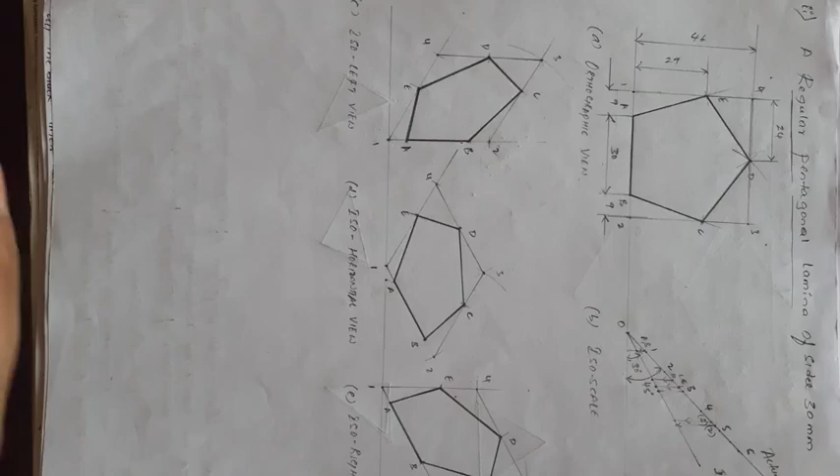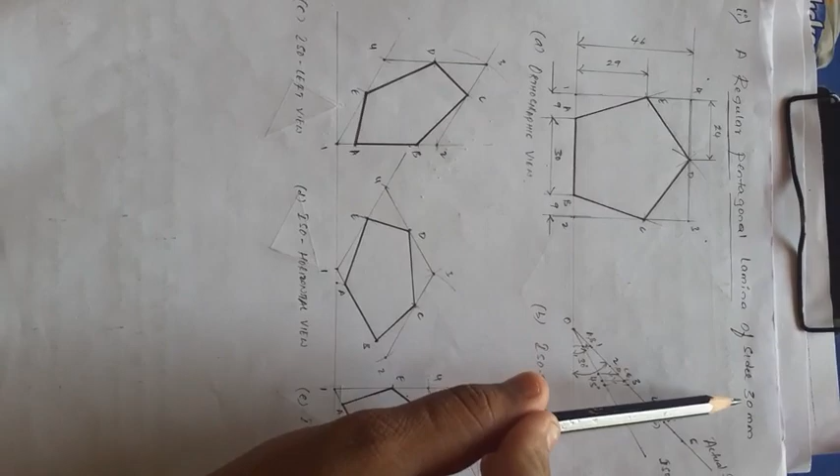What is the procedure? First draw the orthographic projections, and bound that orthographic projection of the lamina by a rectangular box, naming it 1, 2, 3, 4.

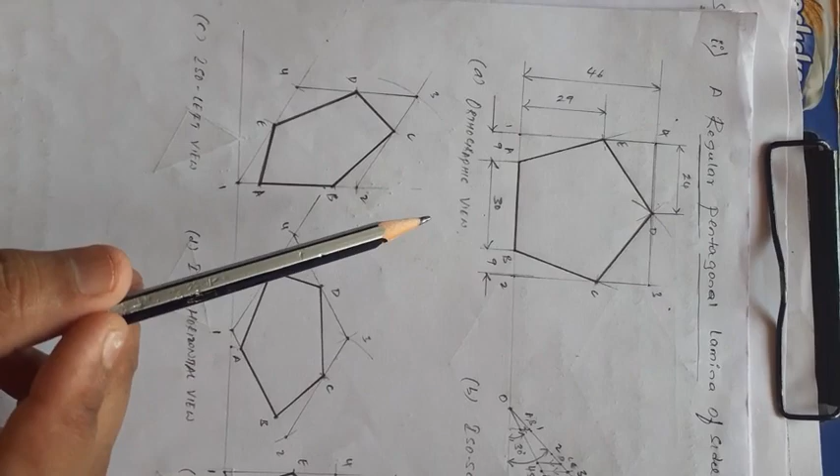Then give the dimensions of the rectangular box and each corner of the lamina. Second step, draw the isometric scale, and third, draw the isometric projection of the lamina.

Right, now first step is the regular pentagonal lamina of 30 mm sides. Do you know how to draw the regular pentagonal lamina?

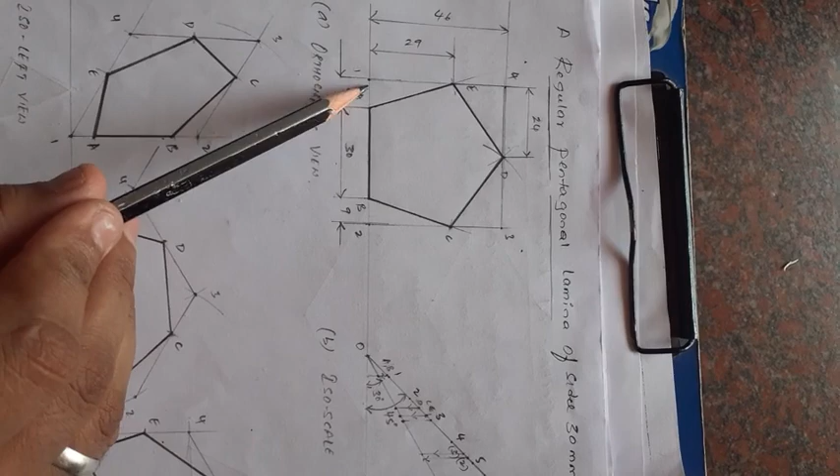Draw a horizontal line of 30 mm. Then with respect to that horizontal line, measure 72 degrees on both sides, and draw the 72 degree line. Using the compass with radius 30 mm, draw an arc on the 72 degree line.

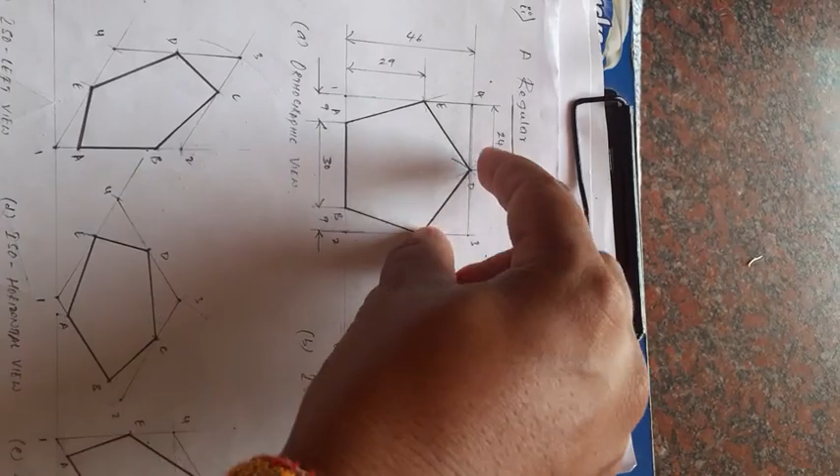From the 72 degree line, once you draw an arc, from the intersection point again take 30 mm radius through the compass and draw an arc from each corner. Then you will get this point.

Then darken all the edges. Now that is the regular pentagonal lamina construction.

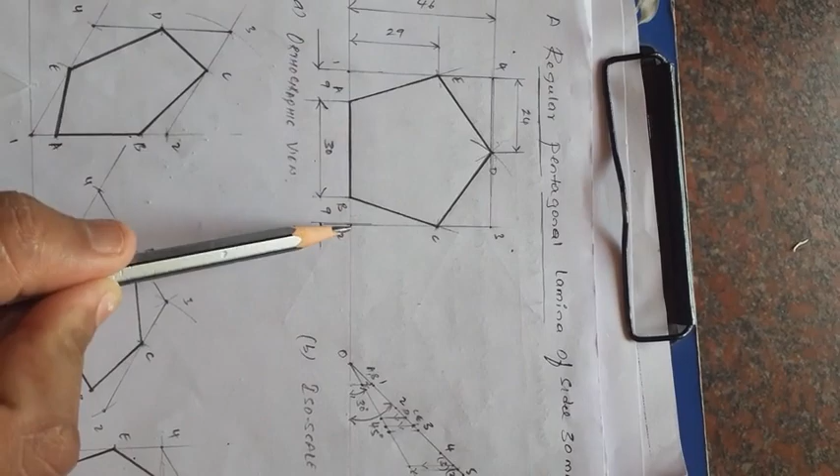After that, the lamina should be bound by a rectangular box. See that 1, 2, 3, 4 is the rectangular box, and then give the dimensions for the rectangular box along with the corners of the lamina. This is the first step.

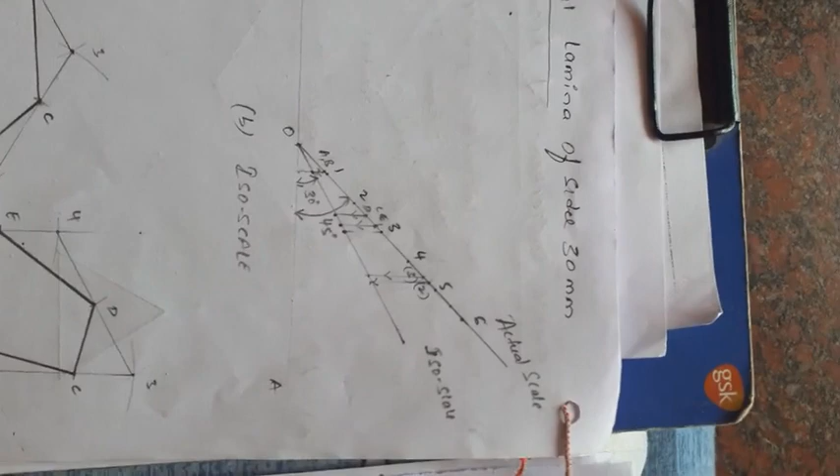Then the second step is to draw the isometric scale. Just draw a horizontal line, that horizontal line is OA.

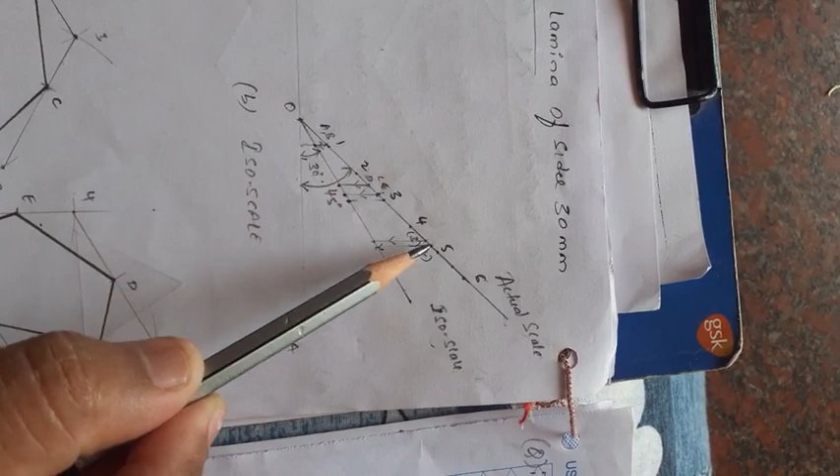Then, with respect to the horizontal line, mark the 30 degree and 45 degree lines. The 45 degree line is called the actual scale, and the 30 degree line is the iso scale. Along the 45 degree line, the actual scale, measure 1, 2, 3, 4, 5 centimeters.

Now I want to draw the first iso left view. What is the iso left view? What is the angle included here? First draw a 90 degree line, then a 150 degree line, or from this side a 30 degree line. Draw the 90 degree line and the 150 degree line.

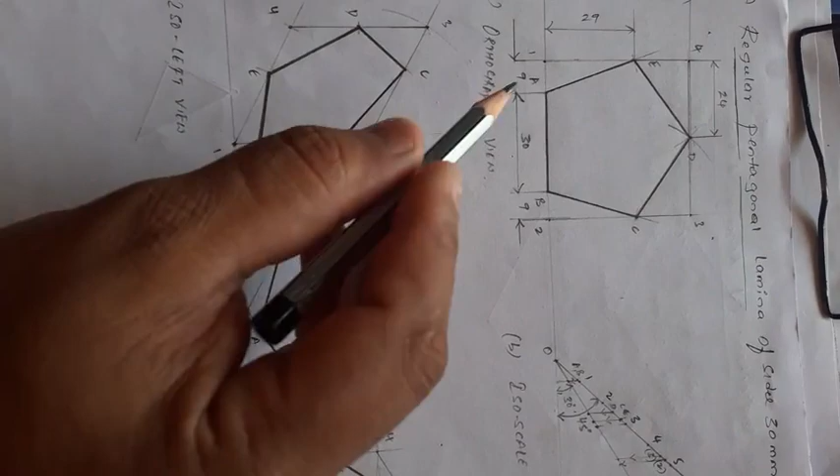Now from this point, called the corner of the rectangle, that is point 1. Once you mark point 1, what is the distance 1 to 2? It is 9 plus 30 plus 9, which is 48.

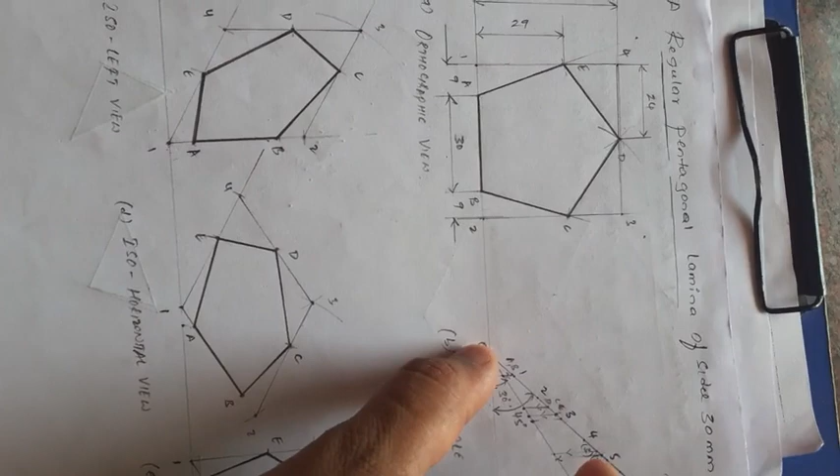48. Now take 48 through the compass on the actual scale and draw an arc. That 48 is represented here in bracket 2. From the 45 degree line, at 48 mm, draw a vertical line that touches the iso scale. Then measure from O to this point.

Then take that through the compass, and from center 1 draw an arc on the 90 degree line. That gives point 2.

Similarly, 1 to 4, what is the rectangular box length? The length of 1 to 4 is measured as 46 mm. Again through the compass, take 1 to 4 as the radius, with O as center, draw an arc on the 45 degree line. That is marked as 3 or 4, as you can call it.

From this, draw a vertical projector, which touches the iso scale or 30 degree line. Then through the compass, measure O to that distance, and from point 1 draw an arc on the 150 degree line. Similarly, with the same radius through the compass, draw one more arc.

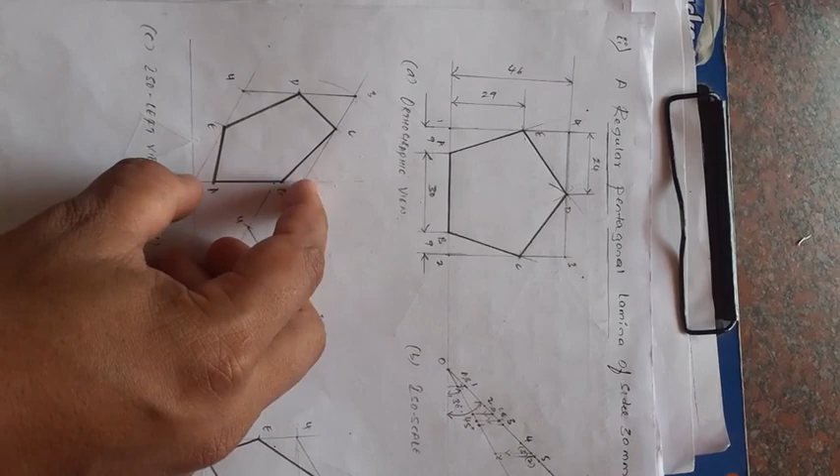Now we already know the 1 to 2 distance, which is equal to 3 to 4. Take that same radius through the compass, which is 1 to 2, and from center 4 draw an arc. The intersection point is called 3.

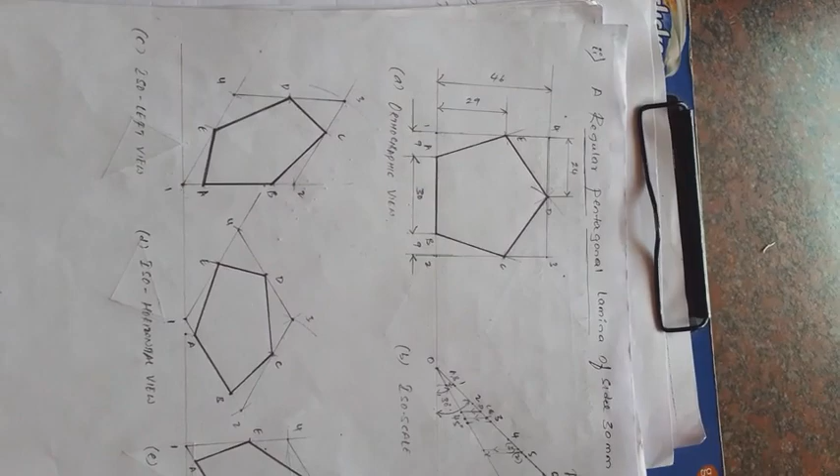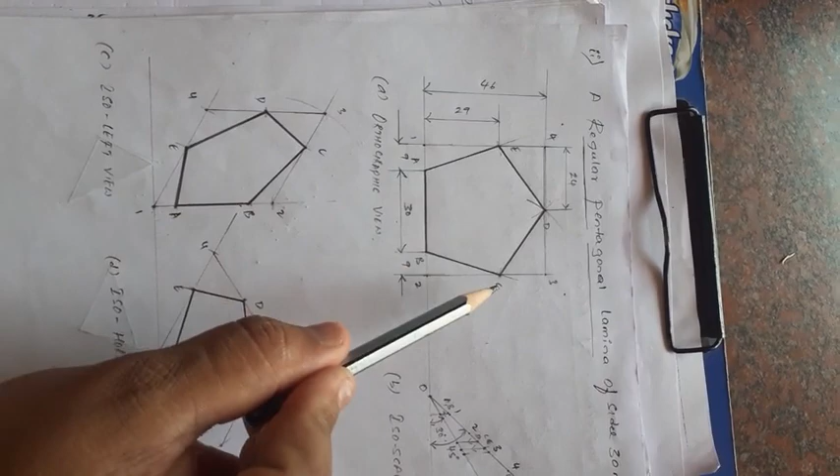First you transfer the rectangular box, which is bounded by the regular polygon, onto the 90 and 150 degree lines. Then you get 1, 2, 3, 4. Then how do you transfer the corners A, B, C, D, E of the lamina onto this 90 and 150 degree line?

Now measure 1 to A, how much is it? 9 mm. Again through the compass, draw an arc of 9 mm on the 45 degree line, called A or B.

From the 45 degree line, draw a vertical projector that intersects the 30 degree line, then take this radius, which is 1a, equal to 2b.

Then where does A lie here? A lies between 1 and 2. So take that distance 1 to A through the compass, and from 1 as center draw an arc. That same distance is also from 2 to b, which is 9 mm.

2 to B is how much? 9 mm. Then again draw the iso scale, convert into iso scale. Then 2 to B also draw an arc. Now we'll get point A and point B, corner A and corner B.

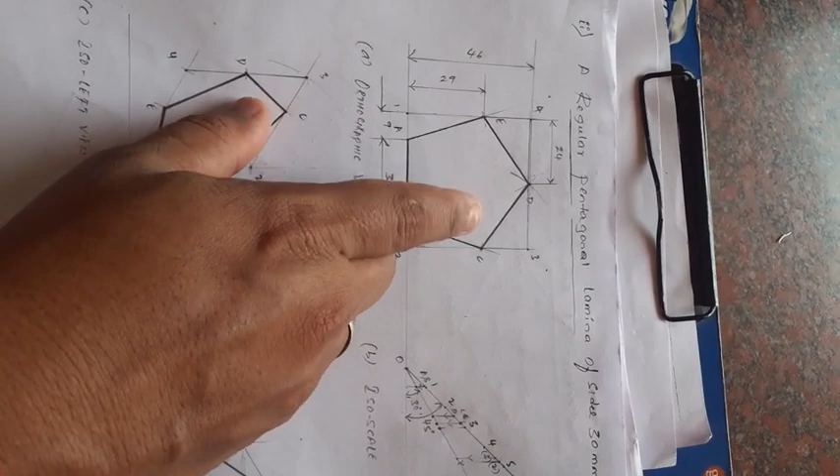Similarly, the E and C distance from this horizontal line is same, right? Measure 1 to E, that is equal to what? 2 to C, how much is it? 29 mm, right? Through compass, O center, draw an actual scale, that is 29 mm, that is C or E.

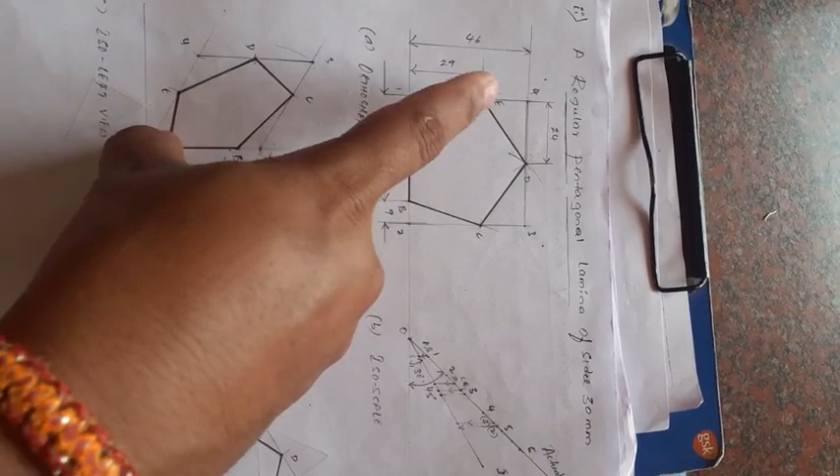Draw a vertical projector on the iso scale. Then O2, this C here on the 30 degree line, measure here. Then take one as center, draw an arc. Where it is, E comes here, E comes between the line of 1 4, right? 1 4 is there, then draw an arc, that gives E.

Similarly, E is equal to C, the distance is same, right? Again C lies between 2 to 3, from 2 as center, draw an arc on the 2 to 3 line. Then we will get point E and point C.

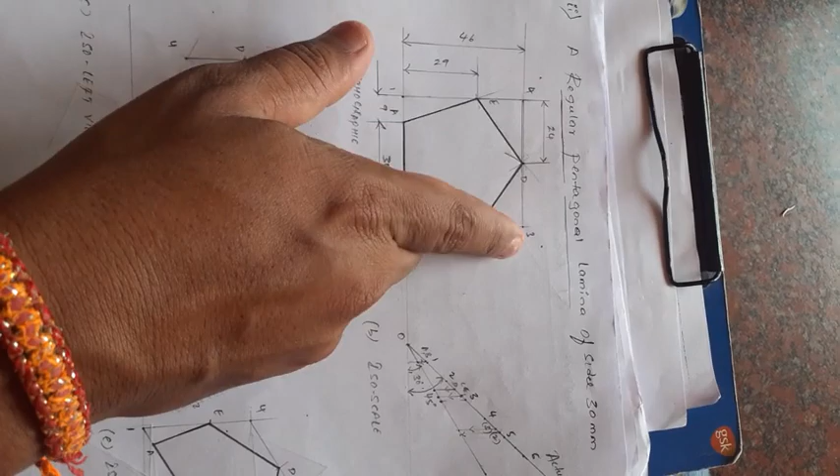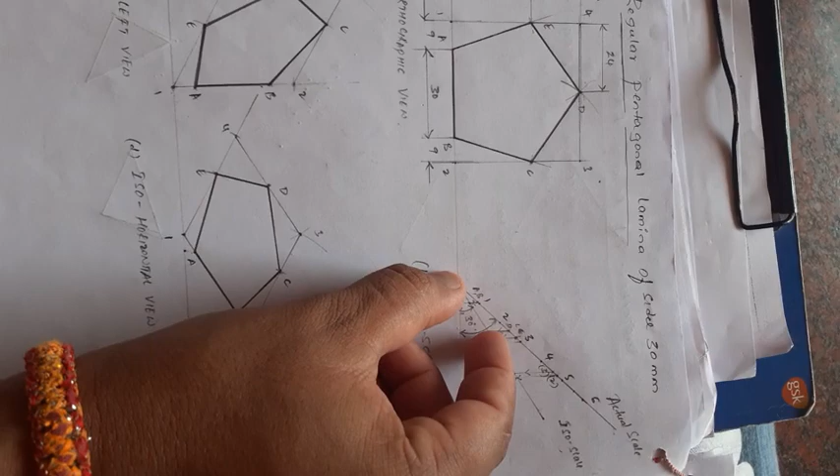Next, how to get point D? Point D lies between 4 and 3 line, right? Take 24 mm through compass, take it in the actual scale, 24 mm, that is point D here, see that. Then draw vertical projector on the iso scale, then through compass measure this point. Then where it is D lies between 4 to 3, then 4 as center, draw an arc, that gives a D point.

Now when we get A, B, C, D, E, then draw it as a continuous thick line, that gives the iso left. Similarly go for iso horizontal.

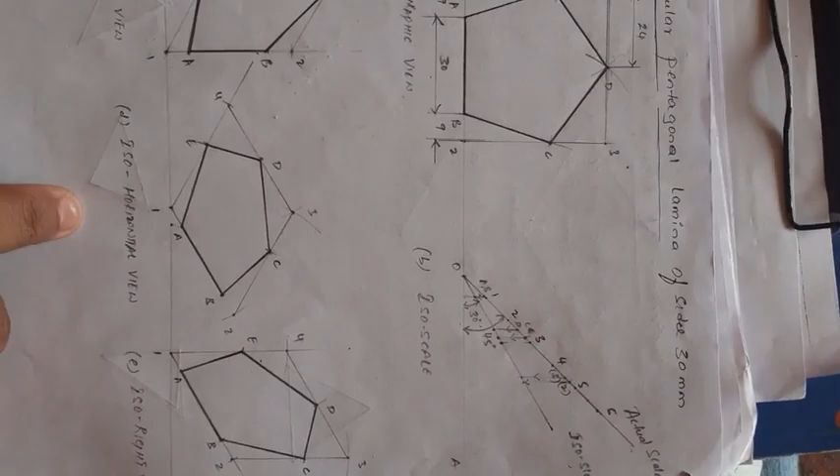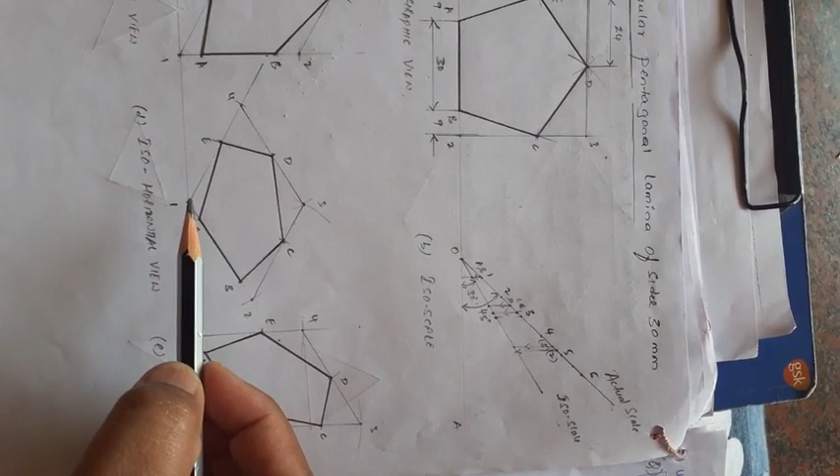For iso horizontal, what is the angle here? The angle is 30 degree, this side also 30 degree, and with respect to this line it is a 150 degree line, right. Mark that, draw from this, draw a 30 degree line and 150 degree line. This point is called as 1.

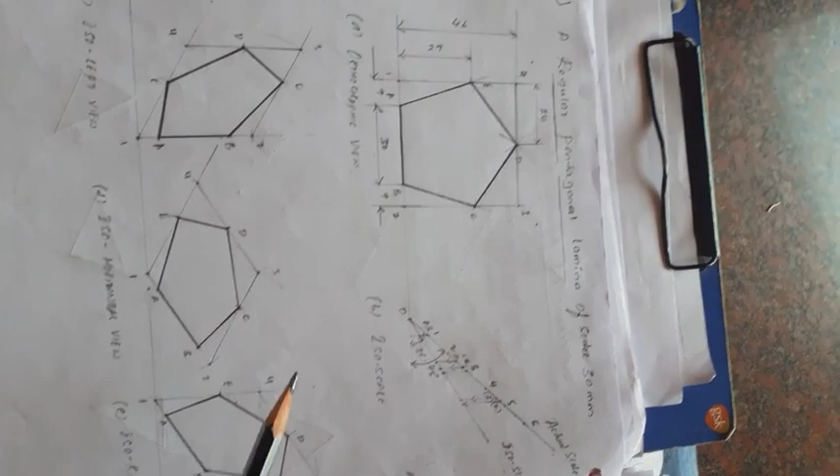Then how do you get corner 2? Directly once you draw this one, similarly directly you just through the compass measure 1 to 2 here and then draw here. Similarly 1 to 4 measure here and draw on the 150 degree line. We will get 2, point 2 on 30 degree line, point 4 on 150 degree line.

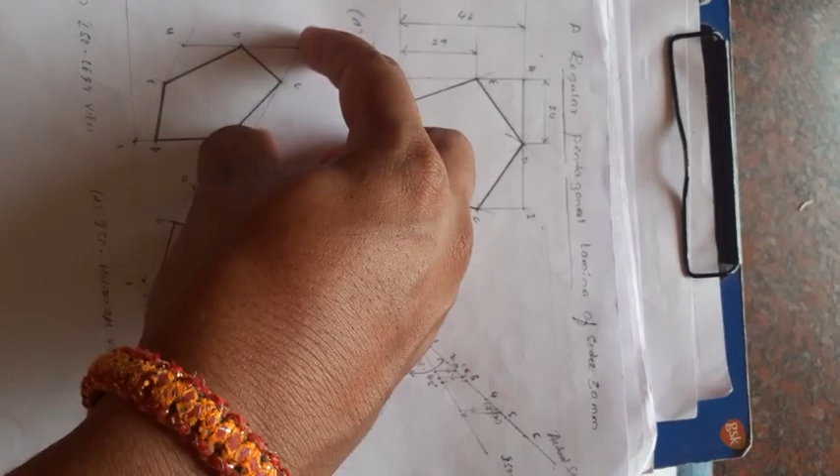How do you get point 3? Then 2 to 3 measure here, 2 to 3 draw an arc. Then 4 to 3 measure here, 4 to 3 draw an arc. Now you get the rectangle box, 1 2 3 4.

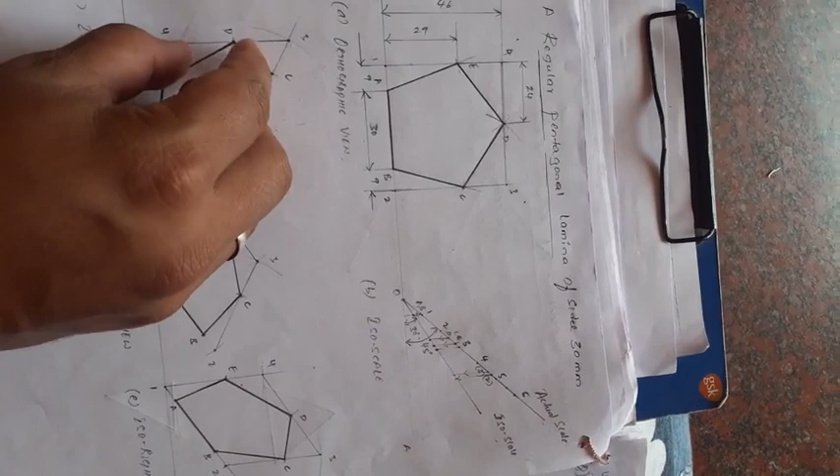Then in the same way, for 1 to A measure through compass, draw an arc on the 1 to 2 line, that is point A will get. Similarly 2 to B. Similarly 1 to E measure, 1 to E and 2 to C. Then measure 4 to D here, then transfer here 4 to D. Now we will get the corner, then join all those corners, we will get the iso horizontal view.

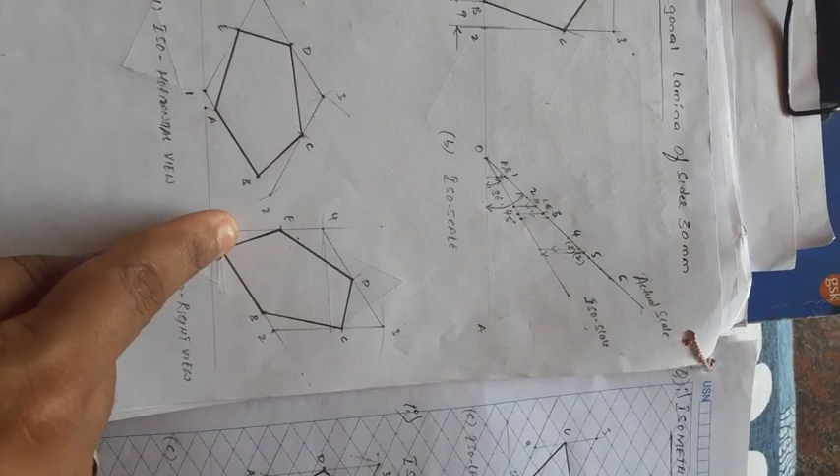Similarly try for this one, for iso right view. Iso right view, what is the angle equal here? 30 degree and 90 degree line, 30 degree line and 90 degree line. Same steps you followed here, right.

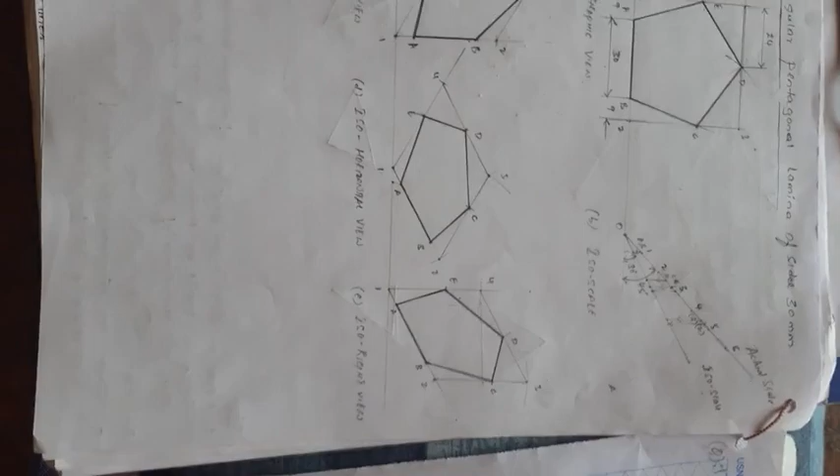Now this is in the plain sheet paper. Then how do you get it in iso sheet, right? This is iso sheet. Now remember, this is what these lines are called as 30 degree line, and these lines are 150 degree line, right. Now the box is represented on the 30 degree line, here given the scale 1 unit is equal to...

8.164 mm, means what is 1 unit? Nothing but 10 mm. So 10 mm of actual length is equal to 8.164 mm of isometric length, or you convert into centimeter, 1 centimeter actual length is equal to what we see in the graph sheet. 1 centimeter actual length is equal to 0.8164 centimeter of isometric length.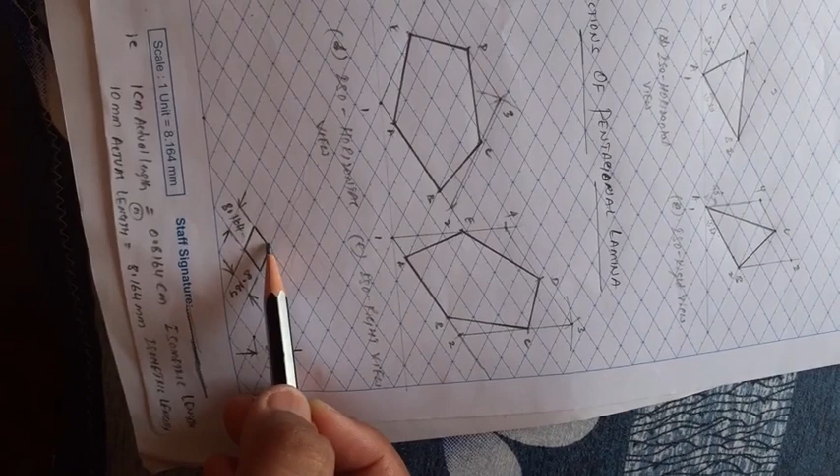Now this distance is what? Isometric length is 8.164 mm, right. This also on 30 degree line, on the 150 degree line also is 8.164. Vertical line also you can take here, from this point to this also it is 8.164 mm, right. Now this is how it looks for iso left, that is 90 degree and 150 degree line.

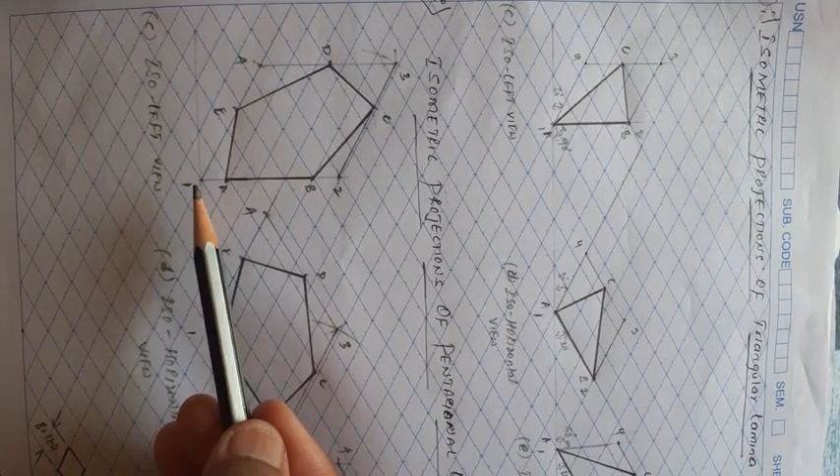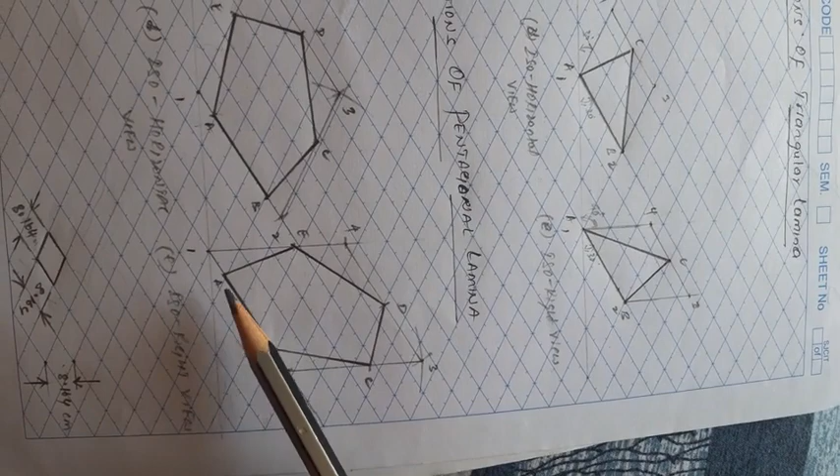It's an iso right, that is 30 degree, and this side also 30 or 150 degree from this side. Iso right: 30 degree line and 90 degree line. Right? Try to solve this problem.

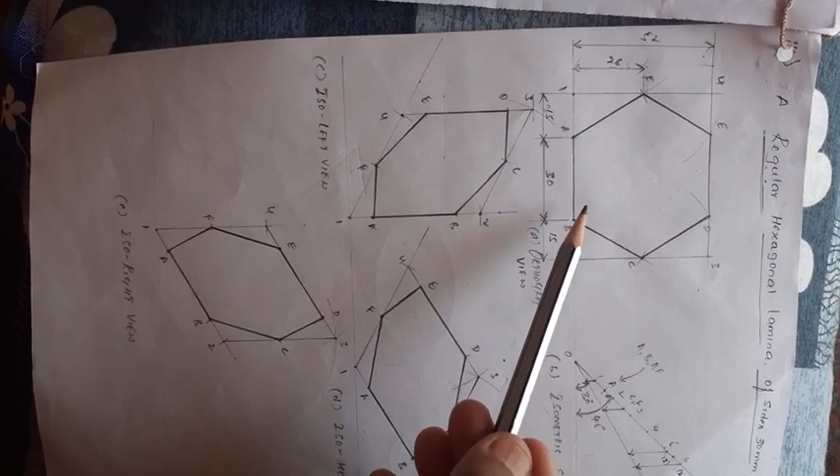Similarly, go for another one, a hexagonal. Go for a regular hexagonal lamina of sides 30 mm. So go for the same procedure. First, draw the orthographic projection of the hexagonal lamina bound by a rectangular box and give the dimension for the rectangular box along with the corner of the hexagon.

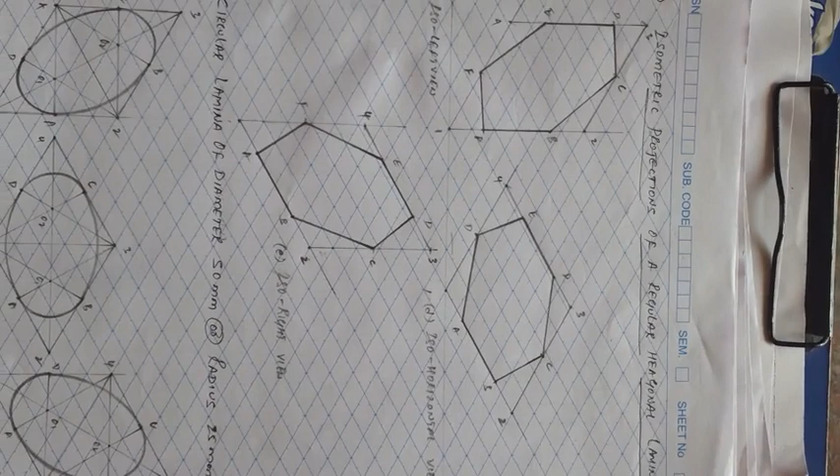Then draw the isometric scale. Then draw the isometric projection, whether iso left, iso horizontal and iso right. Now this is how we look in the isometric sheet.

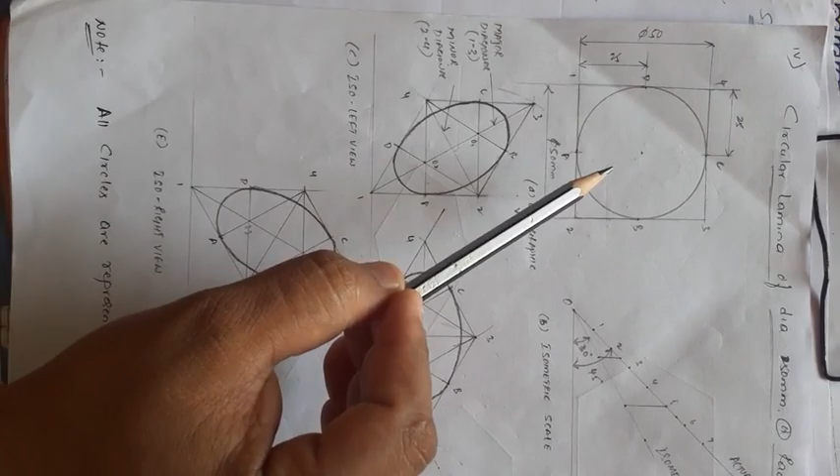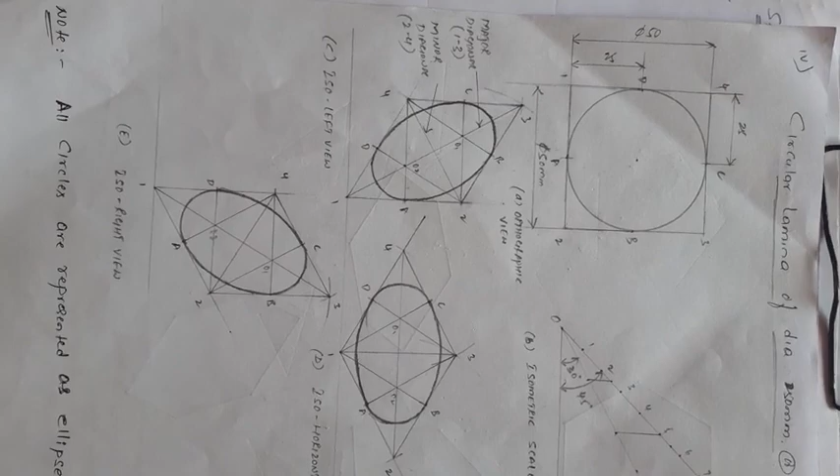Now the next problem is a circular lamina of diameter 50 mm or radius 25 mm. First draw the circle of diameter 50 mm, by taking the compass radius 25 mm. The circle is bound by a box. What type of box? Not a rectangle, it is a square box. Each side of the square box is 50 mm, and the center is 25 mm. So here we get directly 25 and 50 mm.

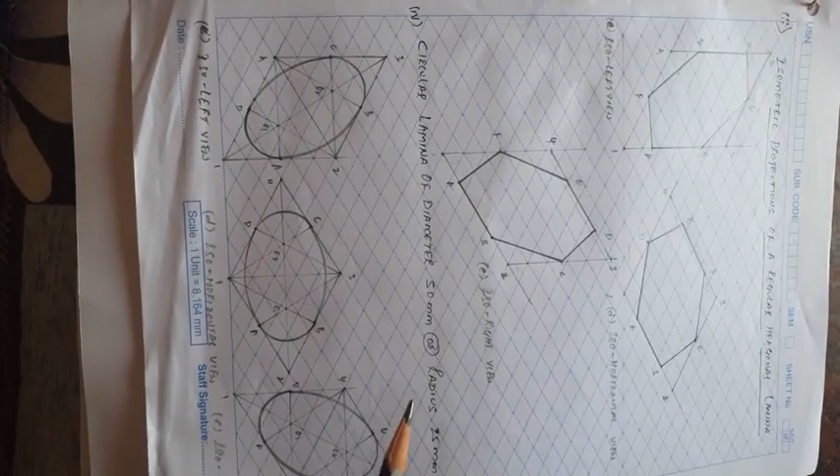Either you want to draw an isometric scale or not, directly use the isometric sheet. So this is the first position, orthographic. Draw the orthographic view of the circular lamina bound by a rectangular or square box and give the dimensions. Then, if you want, draw the isometric scale on a plain sheet of paper, or if using an iso sheet directly do it. No need for isometric scale because the dimensions are round values, 25 and 50 mm.

Now first we will draw the iso left view. What is the iso left view angle? One is 90 degree, another one is 150 degree, or from this it is 30 degree. First draw the 90 degree line, then the 150 degree line. The corner, name it as 1.

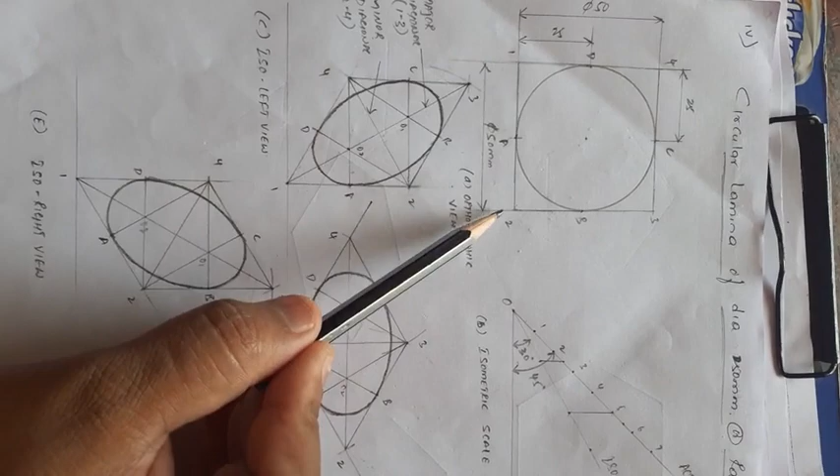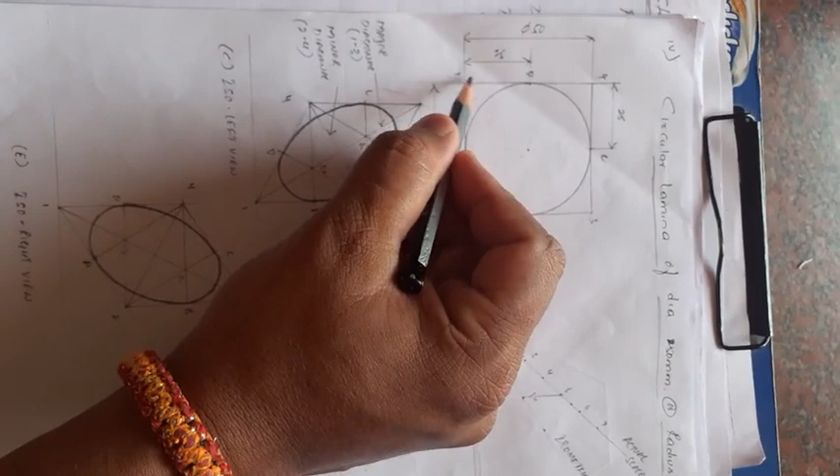From 1 to 2, how much is it? 50 mm. From 0, already in the actual scale, 5 cm is there, 50 mm is there. Draw a vertical projector on the isometric scale, measure this over to this dimension, and through the compass draw an arc on the 90 degree line. Similarly draw 1 to 4, also 50 mm, through the compass on the 150 degree line, you will get points 2 and 4. From 2, again through the compass using the iso scale, radius 2 to 3, draw an arc, and 4 to 3 also draw an arc.

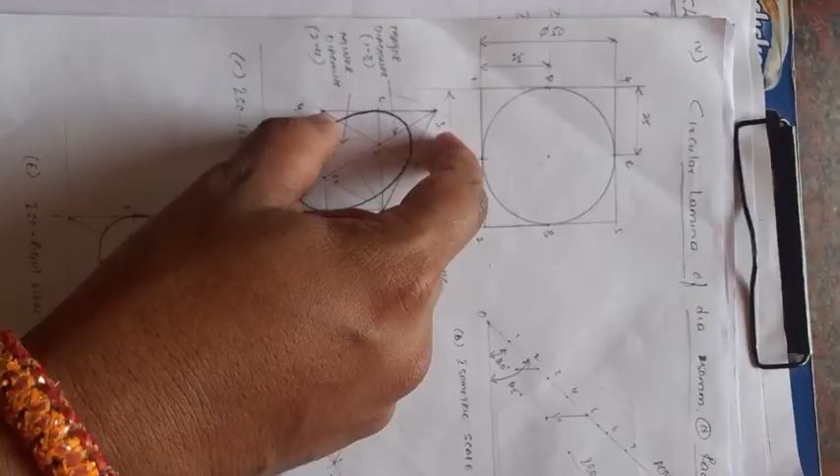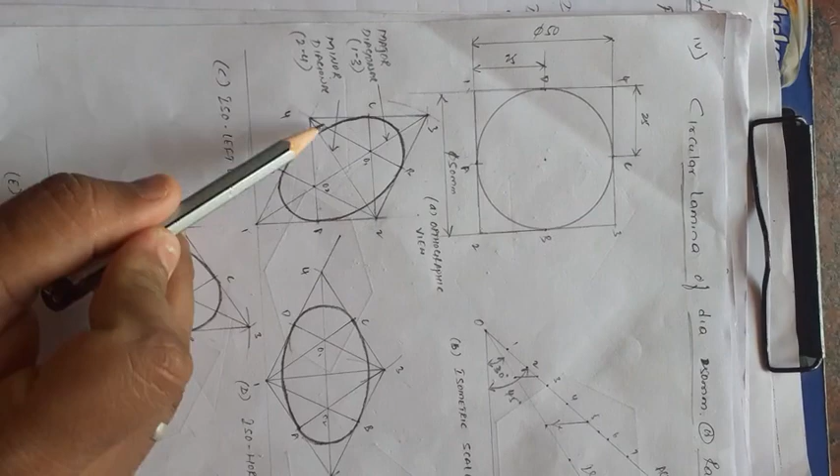That gives 1, 2, 3, 4, the square box that looks as a rhombus in iso left view. Then join the corners of the square, 1 to 3 — this is called the major diagonal. Join this line of corners, and also join 2 to 4 — this is the minor diagonal, that is 2 to 4.

Then you will get 1 to A, the distance, equal to 1 to D, 25 mm. Now on the actual scale measure 25 mm, draw a vertical projector on the iso scale, then measure this over to this point, then from 1 draw an arc on 1 to 2. Similarly on 1 to 4 also draw an arc. That point will give A and D. Similarly from 3, the same distance, draw an arc, and now we will get point B and point C.

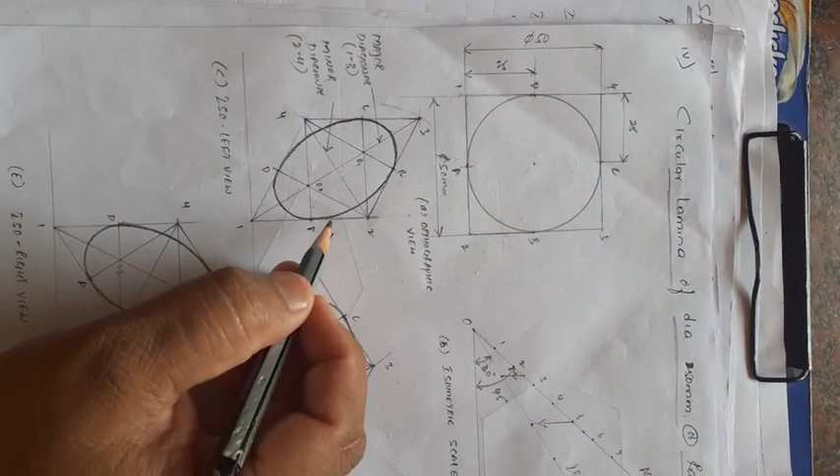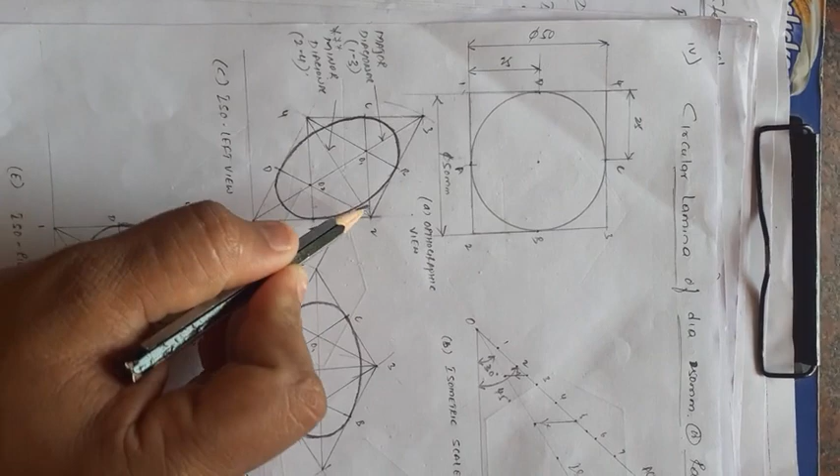Now mark the points A, B, C, D. Now get the center of that rectangular box, which as a square box you will get. Then take the minor diagonals. Remember, this is very important: use only the minor diagonals, which are 2 and 4, the line joining 2 and 4. From the minor diagonal corner 2, draw a line to the opposite side middle points, that is C and D — draw a line, 2 to C and 2 to D.

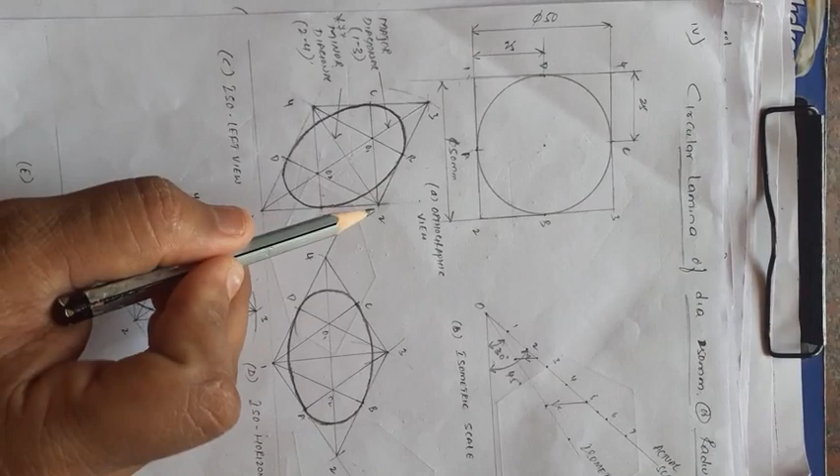Similarly, the other minor diagonal corner is 4; from corner 4 draw a line to the opposite side middle points A and B. Now the intersection of 2 to C, 4 to B, and the major diagonal 1 to 3 is called O1. Similarly, the intersection of 4 to A, 2 to D, and the major diagonal 1 to 3 is called O2.

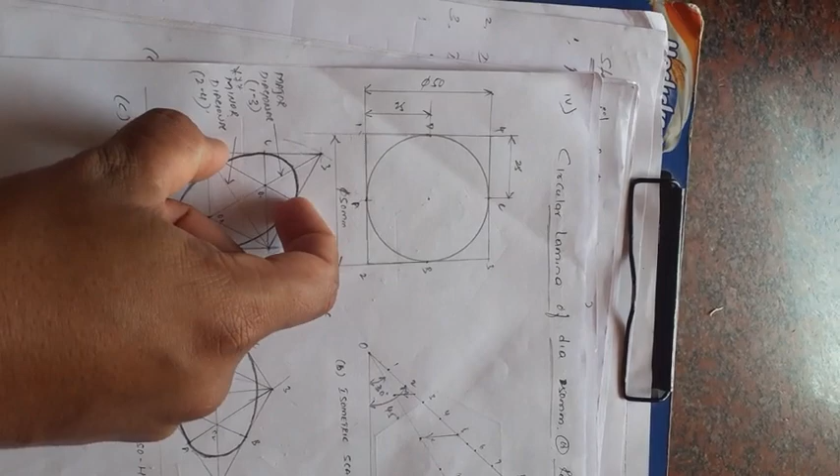Then through the compass, take 4 as the center, with 4A equal to 4B as the radius, and draw an arc. 4 is the center, 4 to A is the radius, equal to 4 to B, then draw an arc. Similarly, 2 is the center, with the same radius, 2 to D equal to 2 to C, and draw one more arc here.

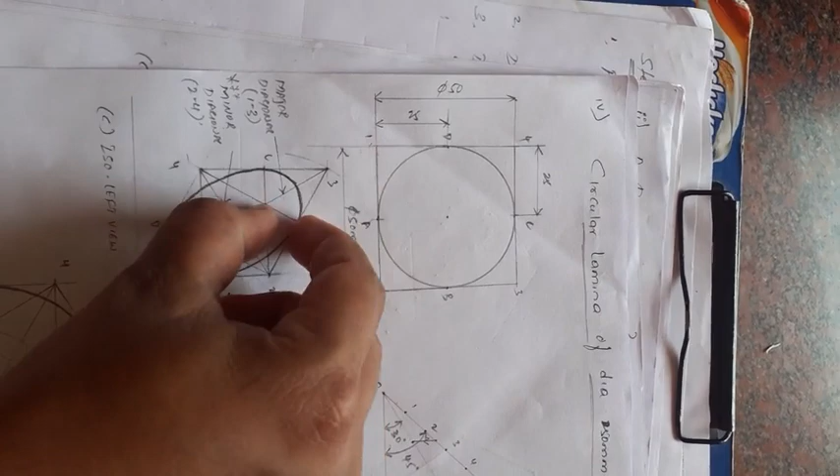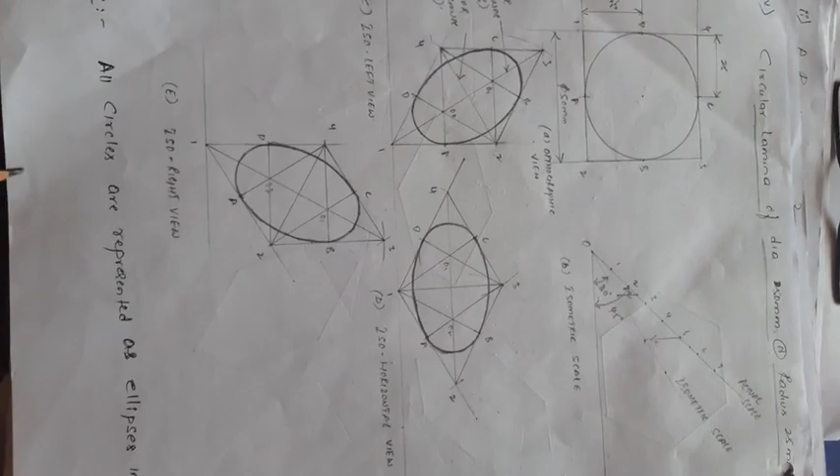After that, take O1 as the center, O1B as the radius, equal to O1C, then draw an arc. Then O2 is the center, O2D is the radius, equal to O2A, then draw an arc. Now the circle looks as what shape? An ellipse. All circles are represented as ellipses in isometric. Now this is how to construct the iso left view, and make the ellipse a continuous thick line.

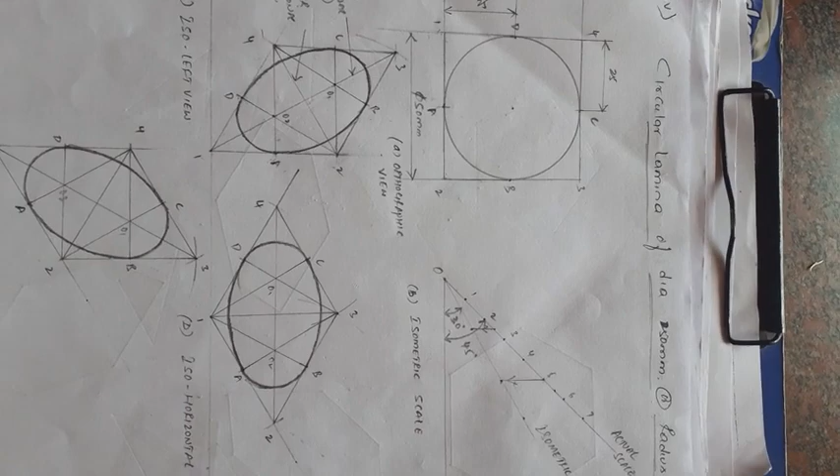See that in isoscale, in the isometric sheet also, what is 1 to 2, how much is it? 50 mm, meaning 10 mm is equal to 1 unit, equal to 8.164 mm. So 1 block equals 8.164. Already here it is 50 mm. 1 to 2, how much? 50 mm means 5 blocks: 1, 2, 3, 4, 5.

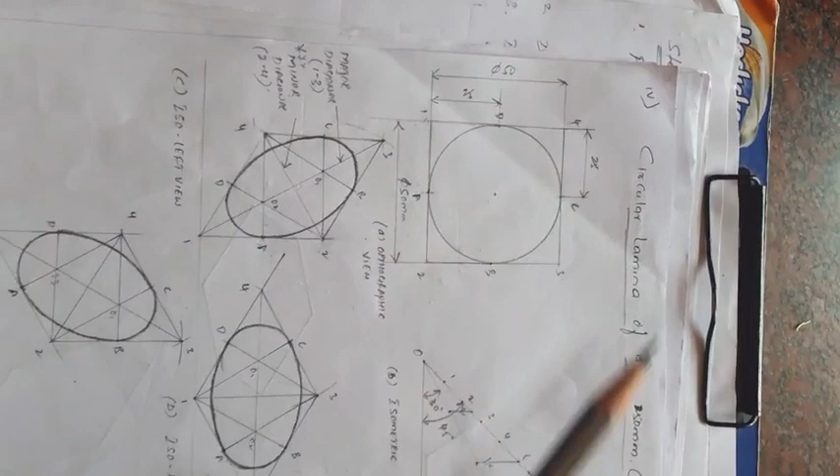Draw a vertical 90 degree line. Along the 90 degree line, how many blocks do you measure? 5. Then you get point 2. Similarly, on the 150 degree line, how many blocks do you measure? What is 1 to 4? 1 to 4 is 50 mm, meaning 10 mm equals 1 block. Now that is converted to isoscale.

Now how many blocks do you measure along the 150 degree line? 5 blocks: 1, 2, 3, 4, 5. You get the square box. Now from corner 4, draw a vertical line, and from this, draw a 150 degree line. The intersection point is called 3. Now you get 1, 2, 3, 4. Now 1 to 3 is the major diagonal, 2 to 4 is the minor diagonal.

Now what steps do we follow here? The same steps are followed here to construct that ellipse for the iso left. Similarly, go for the iso horizontal.

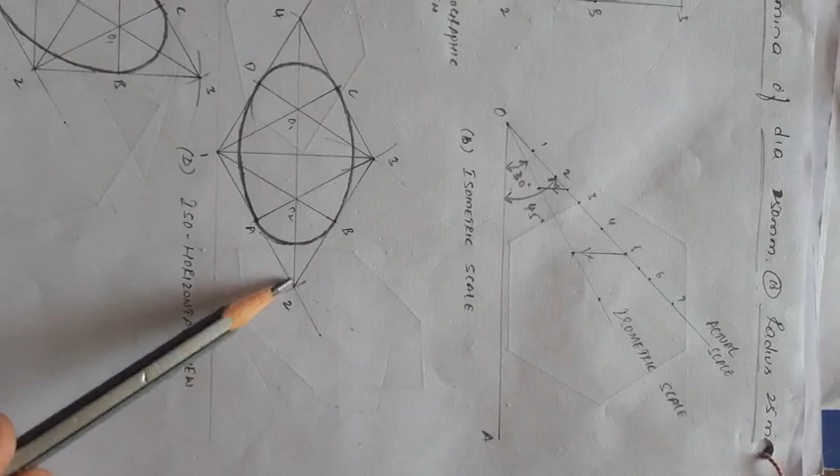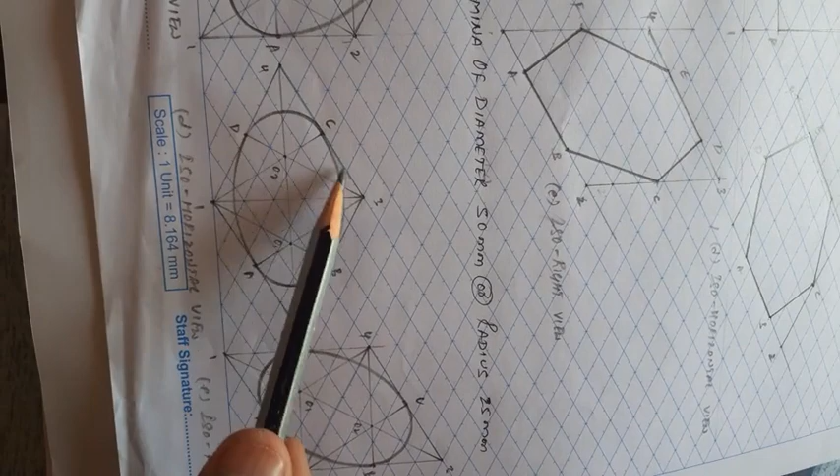Draw a 30 degree line and a 150 degree line. See the 30 degree line and 150 degree line. Along the 30 degree line, measure 5 blocks. Along the 150 degree line also measure 5 blocks. This is 50 mm. Then from 2, draw a 150 degree line, and from 4 a 30 degree line; the intersection point is 3. Here 2 to 4 is the major diagonal, 1 to 3 is the minor diagonal.

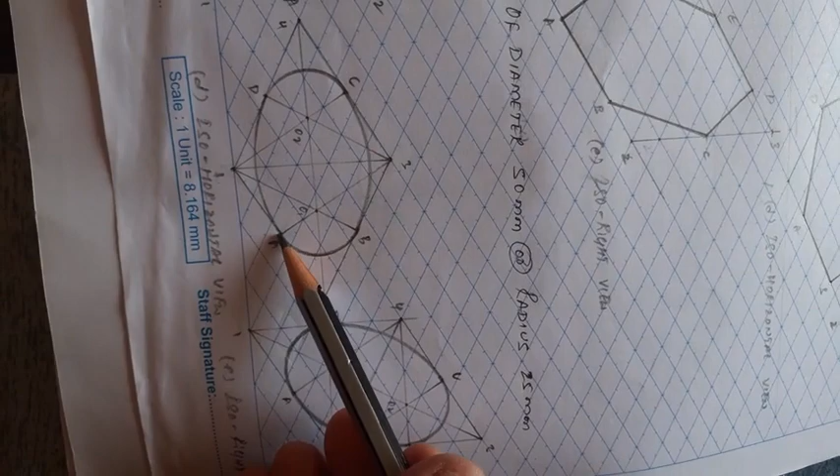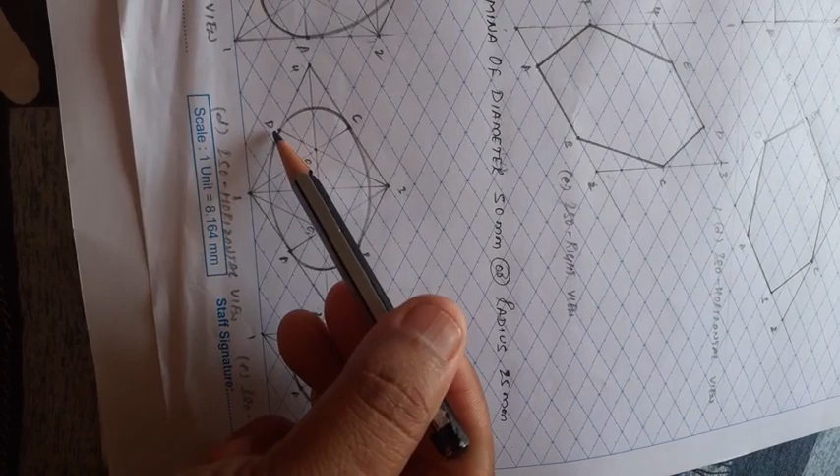How do you get the center point here? Look, the center of the square is 25 mm. 1 to here, 1 to D is 25 mm. How do you get 25 mm? Nothing but 2.5 blocks: 1, 2, you get exactly the center, 2.5 blocks. Similarly, on 1 to 4, what is the block here? 25 mm, how many blocks? 2.5 blocks: 1, 2, here 2.5. Similarly, go for 3 to 4 and 4 to 3 also. You will get A, B, C, D.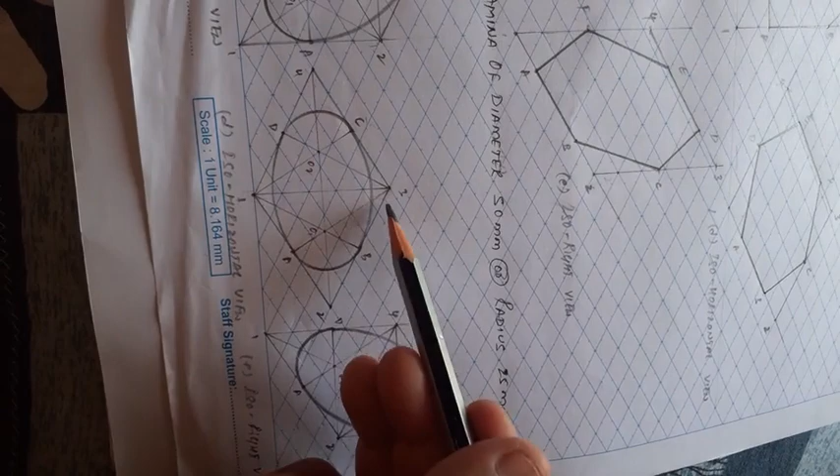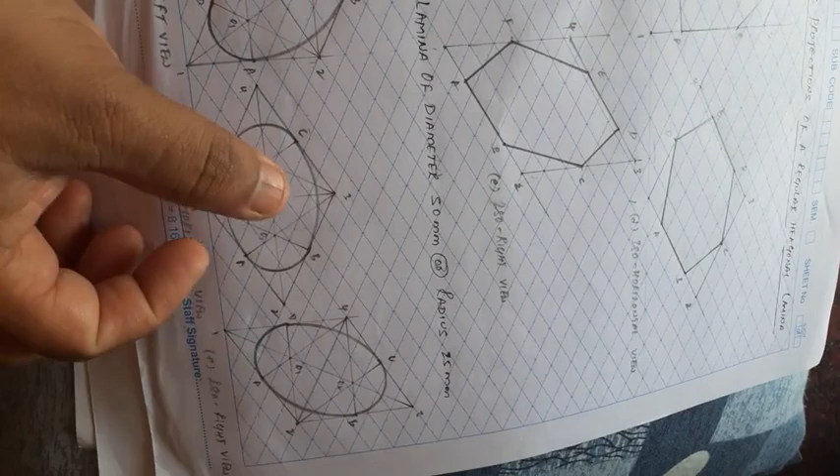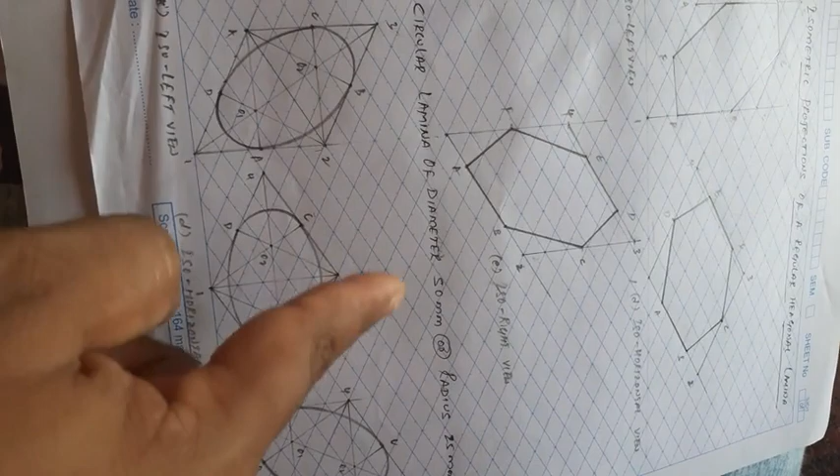Now from the minor diagonal corner, on the opposite side, the middle point, draw a line 1 to B and 1 to C. Similarly, 3 to D and 3 to A. The intersection points give O1 and O2. Take 1 as the center, 1B equal to 1C as the radius, then draw an arc, you get the ellipse. Then 3D equal to 3A is the radius; through the compass, draw an arc, that gives another arc. Then O1 is the center, O1B is the radius, equal to O1A, then draw an arc. Similarly, O2C equal to O2D, then draw an arc, and you get an ellipse—that is the iso horizontal view.

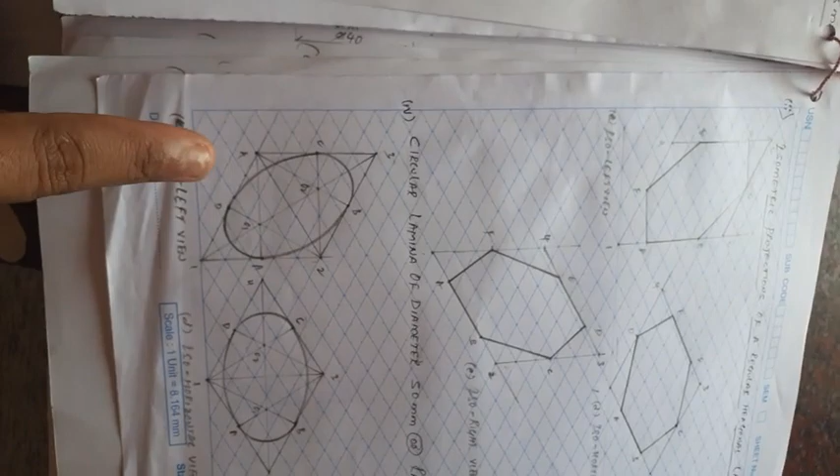Similarly, go for the iso right view. Now in all three positions—iso left, iso horizontal, iso right—we see the circle looks as what? It looks as an ellipse. Now this is a circle.

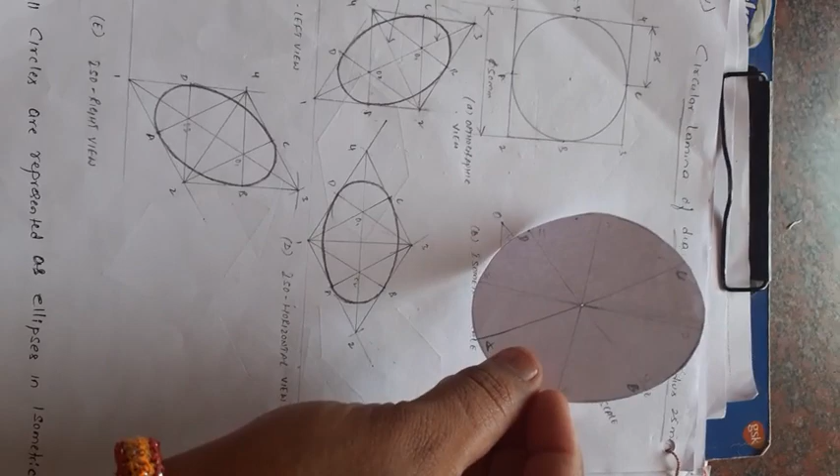Assume this is a 50 mm diameter circle. Now we'll make it iso left. What does it look like here? It looks as an ellipse, for the iso left. Similarly, go for iso horizontal—that also looks as an ellipse. We'll go for iso right—for iso right also the circle looks as an ellipse.

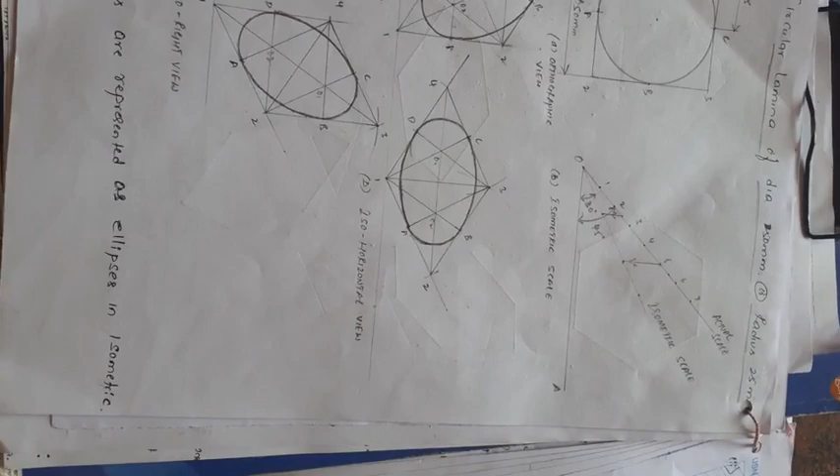This is a concept. Try to solve these problems: the isometric projection of regular polygons—triangular lamina, pentagonal lamina, hexagonal, and circular lamina—and send it to my WhatsApp number. Okay, then we'll check it. Any corrections, we'll do it.

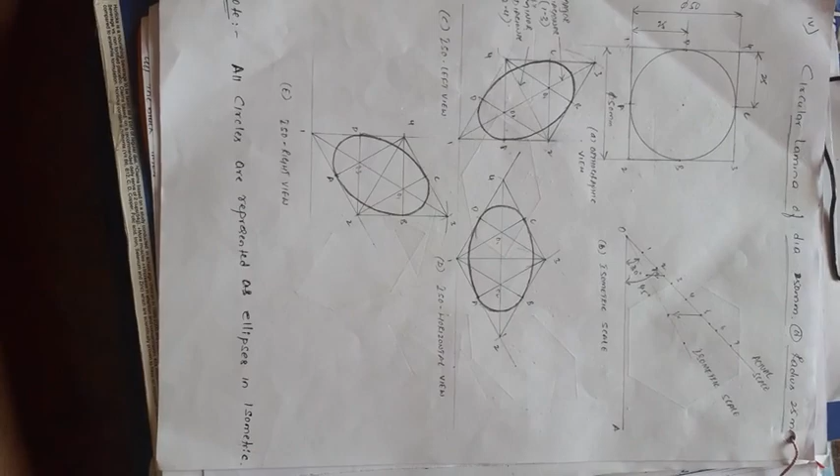Then we'll move on to the isometric projection of solids like prism, pyramid, cylinder, cones, tetra cube, tetrahedron—system of solids. Next class we'll do isometric projection of solids.